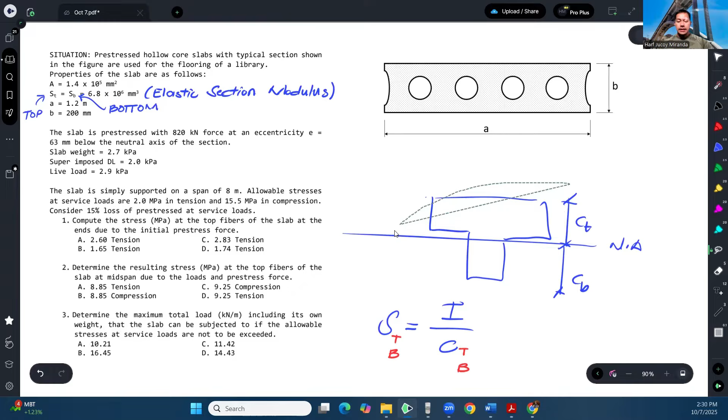Now, we use the elastic section modulus in computing bending stress. As a substitute or alternative to the formula MC over I, we can also use M over S. That is for bending stress.

You're given A to be 1.2, so this is 1.2 meters. And then B is 200 millimeters, so I can just say that this is 0.2 meter.

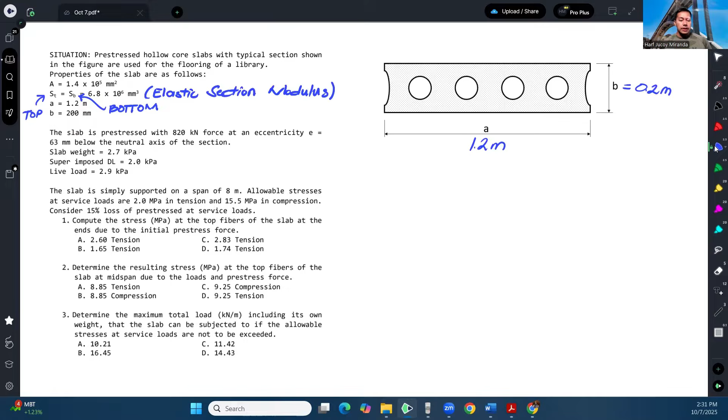So the slab is pre-stressed with 820 kilonewton force at an eccentricity of 63 millimeters below the neutral axis of the section. So the pre-stress force P is 820 kilonewton and the eccentricity is 63 millimeters.

So we are also given the following: slab weight, superimposed dead load, and live load, all in kilopascal. This means there's a superimposed dead load on top of it.

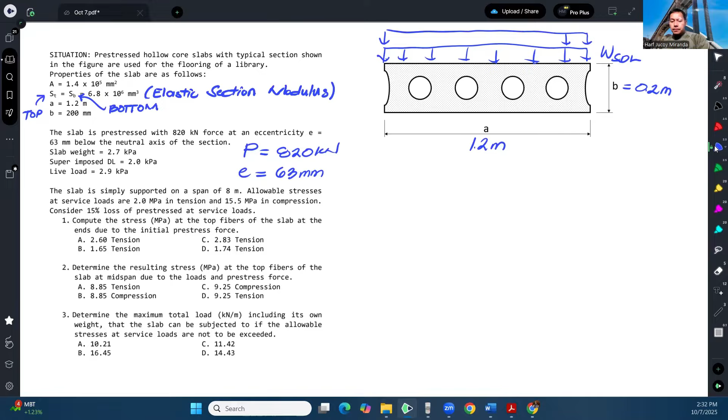So this is the cross-section, with the superimposed dead load on top, and also a live load on top. However, take note these are still in kilopascal, so to convert that into kilonewton per meter, you need to multiply by the width.

The slab is simply supported on a span of 8 meters. Allowable stresses at service load are 2 megapascal for tension and 15.5 megapascal for compression. Consider a 15% loss in pre-stress at service loads.

All right, so first question: compute the stress at the top fibers of the slab at the ends due to initial pre-stressing. So to make clear what cross-section we're discussing, let's say this is it.

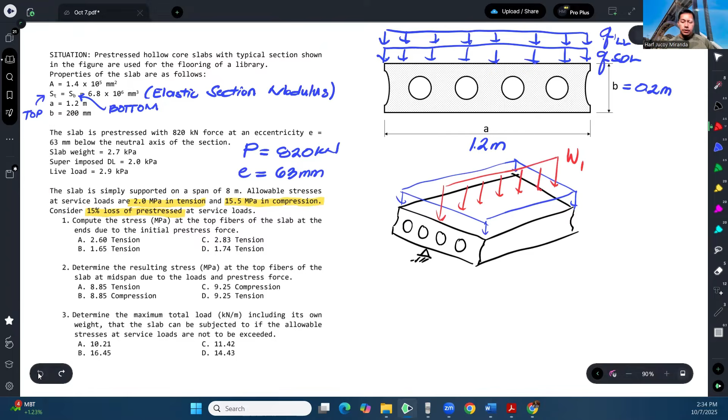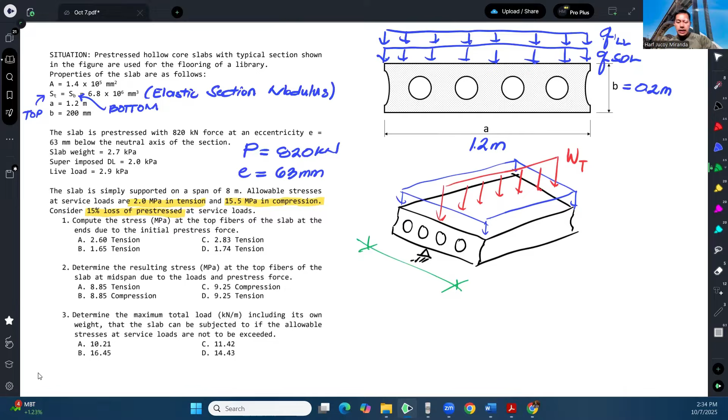Okay, W. So let's make this W total. To get W total, we need to multiply the floor load by the tributary width, which in this case is A, 1.2 meters.

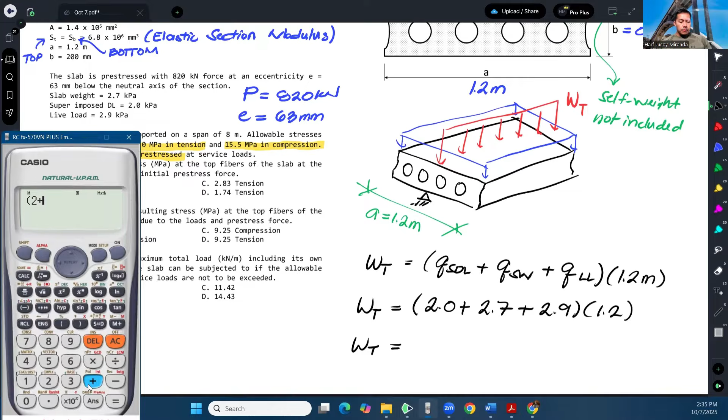Superimposed dead load is 2, self-weight is 2.7, and live load is 2.9, times 1.2. So that's going to give us a total uniform load acting on the beam equal to 2 plus 2.7 plus 2.9, times 1.2, which gives us 9.12 kilonewton per meter. That's the one acting.

By the way, this is the span referred to in the problem. So our span is 8 meters, simply supported.

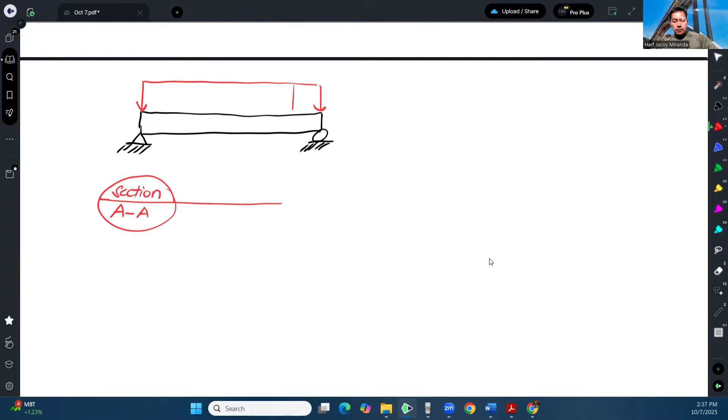Alright, so pag dyan tayo nakatingin sa direction na, ito yung itsura ng section AA. So, makikita natin, it's just a simply supported beam. Ganyan lang siya, okay, tapos ito yung uniform load. And then this is 8 meters. Alright, so ganyan lang siya.

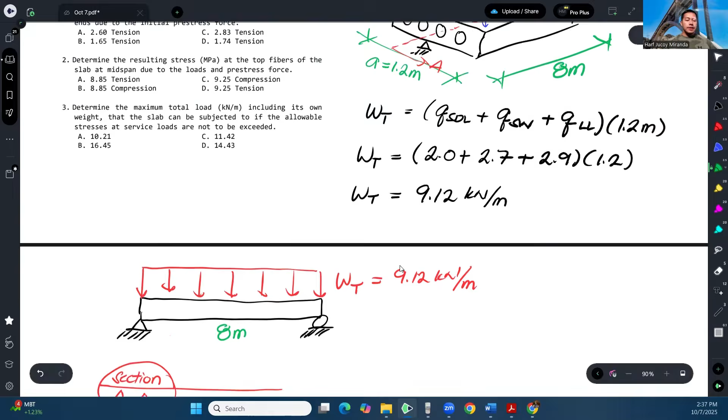So anyway, doon sa unang tanong kasi, and then bago pa dyan, ilagay ko na rin dito. Dahil meron daw pre-stress ito, merong tendons. So kunwari, ito yung tendons, no?

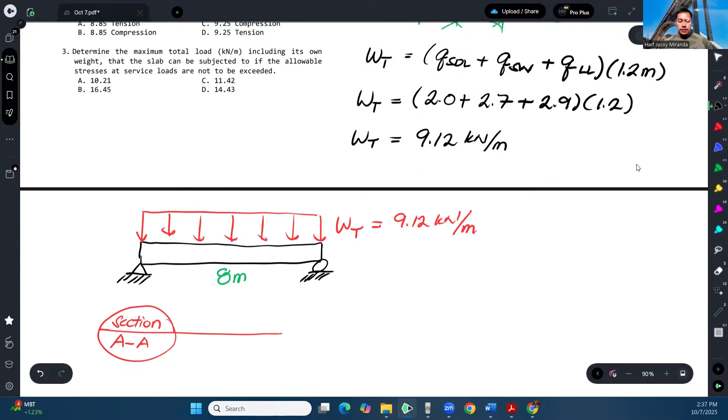Ang sabi niya naman kasi, merong eccentricity na 63 mm. So ibig sabihin, from the neutral axis, ito yung neutral axis, gitna lang kasi symmetrical naman. So, merong distance yung tendons mula doon sa neutral axis. So, kung ito yung neutral axis natin.

Okay, so yung tendon natin, potentially, nandito. Yan, kunyari nandyan. Okay? So, meron siya eccentricity na 63.

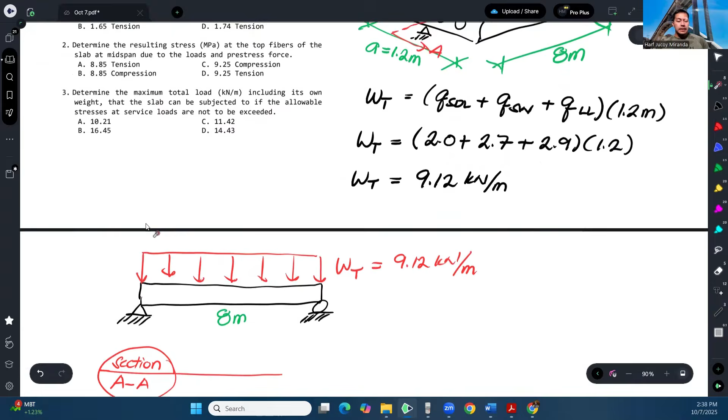Okay? So ngayon, dito walang ini-specify kung saan ba yung tendon, nasa ibabaw ba or nasa ilalim. So by default, kapag simply supported beam, ang simply supported beam kasi masasubject siya sa positive bending eh. So possible kasi na ang bending ng simply supported beam pag ganito eh, di ba?

So the purpose of pre-stress is so that it will create a negative bending, no, that will counteract yung positive bending. And di ba ang negative bending ganito ang itsura?

Alright, so that's why ang kailangan kapag simply supported beam, maglalagay ka ng force sa bandang ilalim nung neutral axis, sa bandang ilalim para ma-produce niya to. Okay, kaya by default dito, ang tinutukoy niya dito na eccentricity sa below nung neutral axis. Okay, kaya nasa ilalim siya.

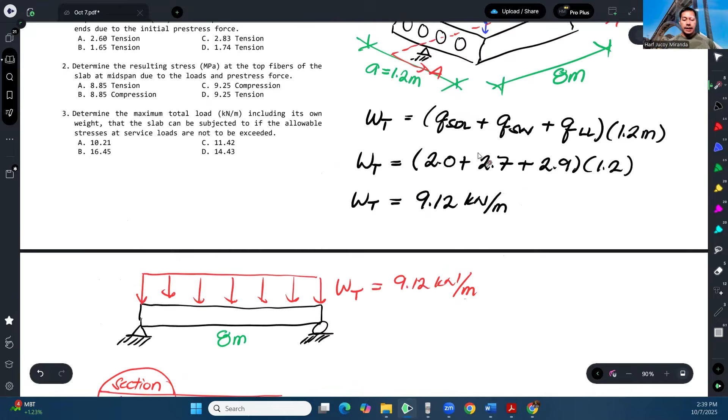Kasi kung sa ibabaw mo ilalagay yan, ang mangyayari guys, magpo-produce yan ng positive bending. So, kapag nasa ibabaw, imagine nyo, meron dito, tapos meron dito. So, syempre, ang gagawin niya dito, pag ganito. So, parang tinulungan niya pa yung load, no, na i-bend yung beam natin. Which is counterproductive dun sa gusto nating maging purpose nung pre-stress tendons.

Alright? Kaya dito, by default, sa ilalim, no? So, anyway, ito yung tendons natin.

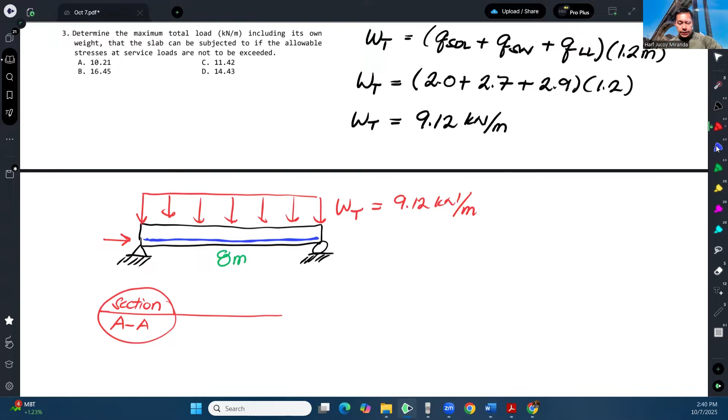Okay? Tapos yung tendon na mag-produce ng axial compressive force. Okay? And according to the problem, it is 820 kilonewtons without losses. No? So, initial yan. Okay, initial.

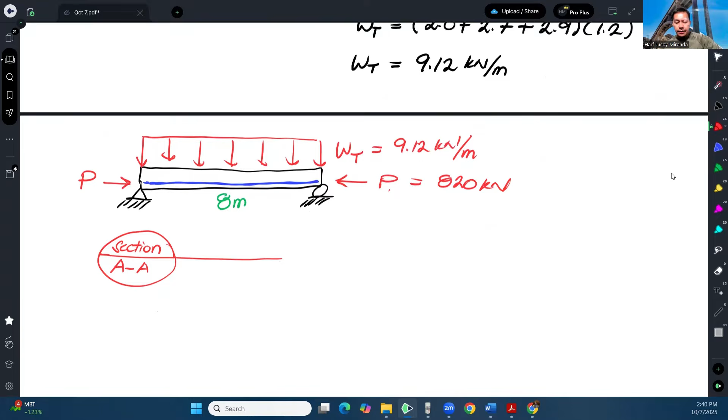No? So, kasi merong sinabi dito na loss. So, ibig sabihin, mamaya, pag nasa service loads na tayo, we need to subtract 15% of this, no? Sa analysis natin. Anyway, sa unang tanong naman, ang tinatanong lang, what is the initial pre-stress force?

Tapos, in-specify na nasa top fiber, no? Sa number 1, top fiber, so sa ibabaw, ano daw yung stress sa top fiber at the ends? So, yung nasa dulo. Okay, due to initial pre-stress force. So, dito sa end, sa dulo, no, bali ito.

Okay, so kunwari yun, pamili na lang tayo ng side. Kasi ito na lang. Kaya yung side na yan, near the end. Tawagin ko section BB.

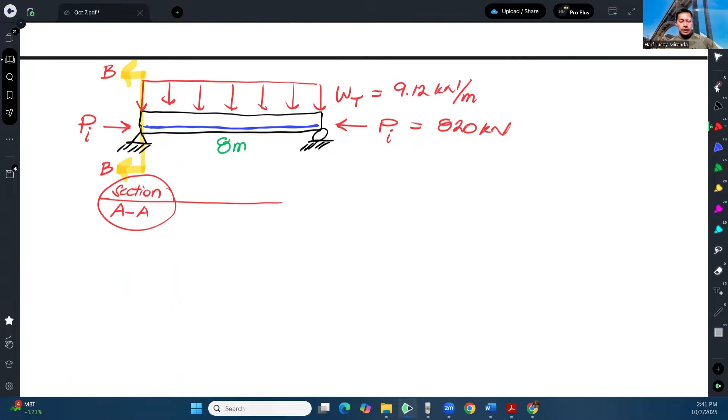So, ang itsura nun, pag pinalaki natin, ganito. Okay, tapos ito yung pre-stress tendons natin. Pinalaki lang natin yung near the end, no? Tapos ito kunwari yung neutral axis niyan. Okay, so bali ito yung cross-section niya dito, no?

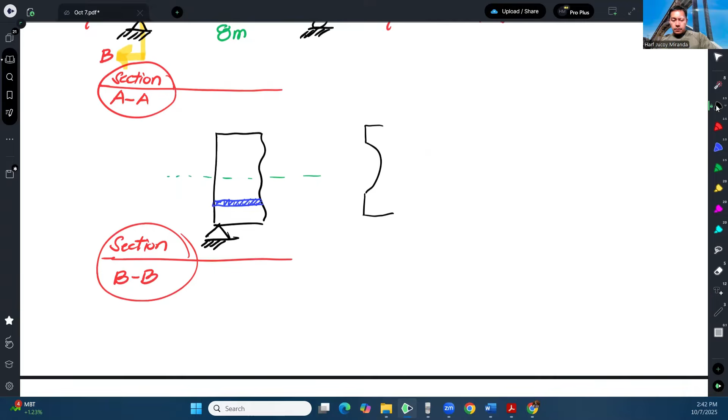Hindi ko na kukumpletuhin, ha? Pero parang ganyan yung cross-section niya. Diba? So, ito yung neutral axis. So, yung tendon na to, nandito. Yan, nandyan. Okay? So, anong gagawin ng tendon?

Mag-produce siya ng compressive force. Okay? So, mag-produce siya ng compressive force. So, yung initial compressive force na yon, dahil merong eccentricity, ito, from the neutral axis, that will also produce a bending moment.

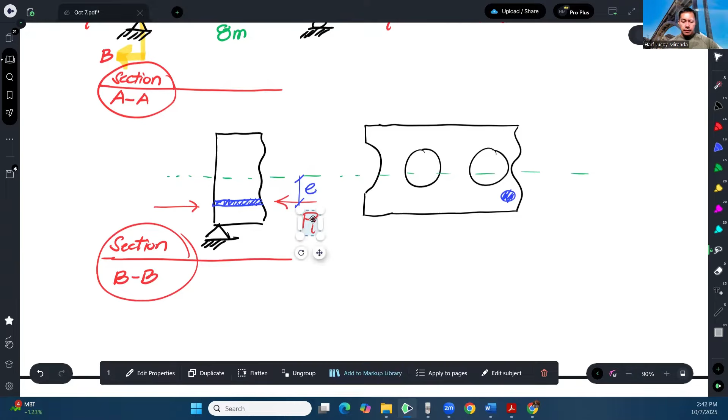Kaya mangyayari, pag nilipat natin to dito, nilipat natin dyan, no? It will produce an equivalent bending moment M due to the pre-stressing force. At yung moment na yon, due to pre-stressing force, is just P times E. Okay? So, ganyan yung mangyayari.

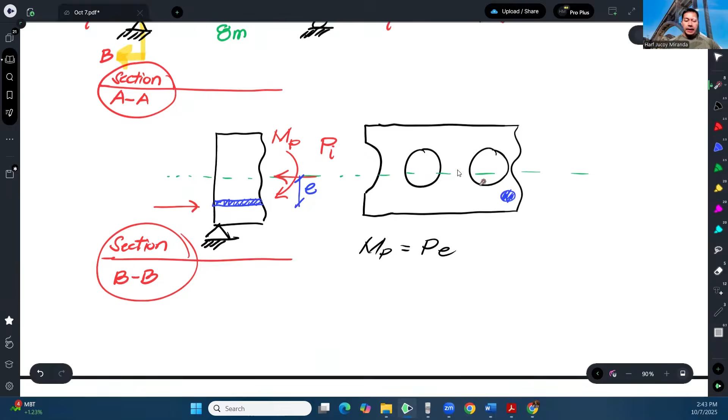So, ngayon, ang pinapa-analyze ay sa top fiber. No? So, yun nandito. Ito yung top fiber natin. Yan, yung top fiber na. So, bali, ito, pinapa-analyze. Ano daw yung magiging stress dyan?

Okay, so dahil nasa dulo tayo, nandito tayo sa dulo, walang effect itong load na to. Kasi kung babalikan natin yung magiging itsura ng moment diagram niyan, di ba? Ang itsura ng moment diagram niyan, ganito lang, zero sa dulo, tapos pa ganyan, di ba? So zero yung moment niya dito.

Kaya ang meron lang moment, no, dito sa particular section na to, sa near the end, would be the one that is produced by the eccentric na compressive force galing sa pre-stress or sa tendons. Okay, kaya bali ganito lang yan.

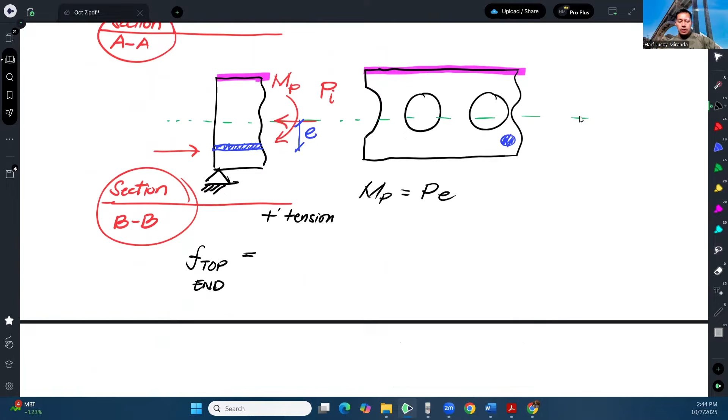So, in number 1, we will need to calculate the stress at the top, no? Sa near the end. Okay, and then lagay lang ako ng sign convention. Di ba normally ginagawa natin positive yung tension, tapos negative yung compression.

Okay, so the PI in this section will produce a compressive force. Because it's compressive, PI over area is negative. And then the MP, the moment due to the pre-stressing force, its effect at the top will be tension, so we make it plus. Moment MP, then we have C, which is supposedly MC over I, right?

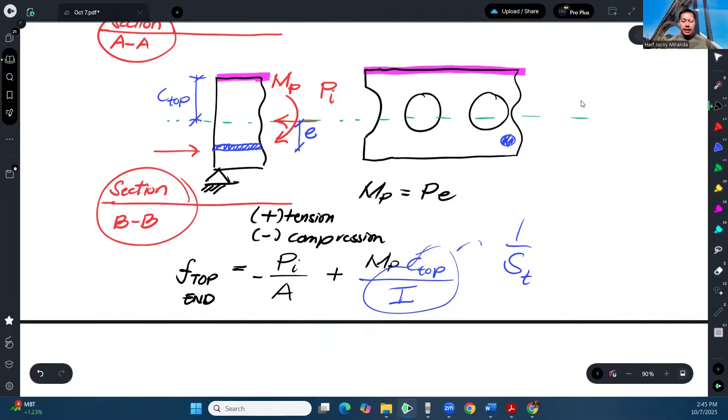That's the C at the top. That should be it, but let me just highlight it. Over I, right? That should be the formula, but take note that this is equal to 1 over S at the top. So we can rewrite the formula for the stress at the top at the end to be equal to negative PI initial over area plus MP over S top. This is because this is also the given value. So instead of using MC over I, we use M over S. And all we have to do here is substitute everything for number 1.

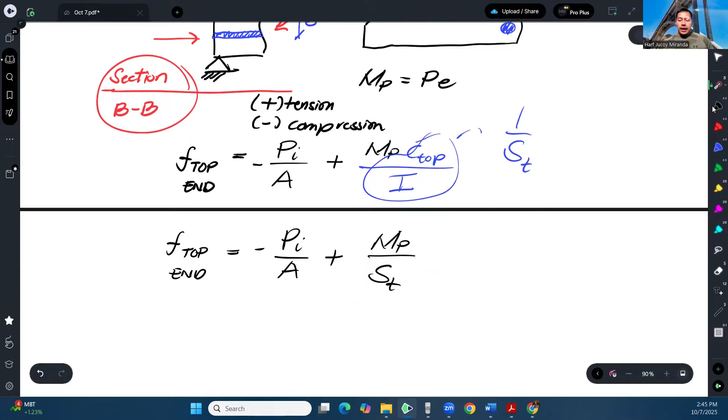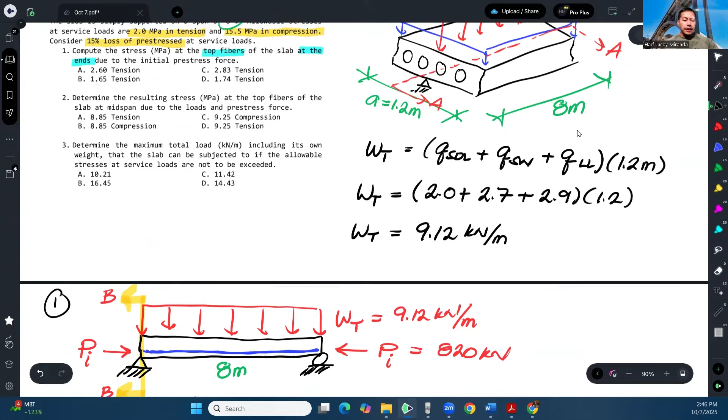So we have negative, the initial pre-stressing force is 820. We want this in megapascals, so let's convert to Newtons and millimeters. As for the area, it's already in millimeters, 1.4 times 10 to the 5. Plus, the MP is PE, so 820, in Newtons. The E is 63, over S, and S is 6.8 times 10 to the 6.

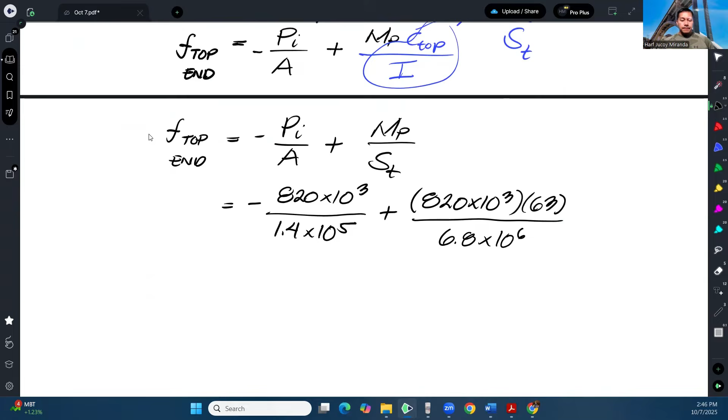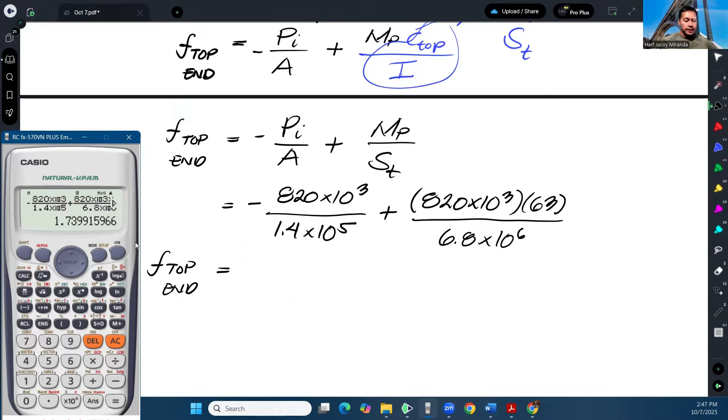From here, we can calculate the stress at the top of the end section. That is negative 820,000 over 1.4 times 10 to the 5, plus 820,000 times 63, which is the M over S, over 6.8 times 10 to the 6. So that gives us positive 1.74 megapascal. The positive sign here means tension.

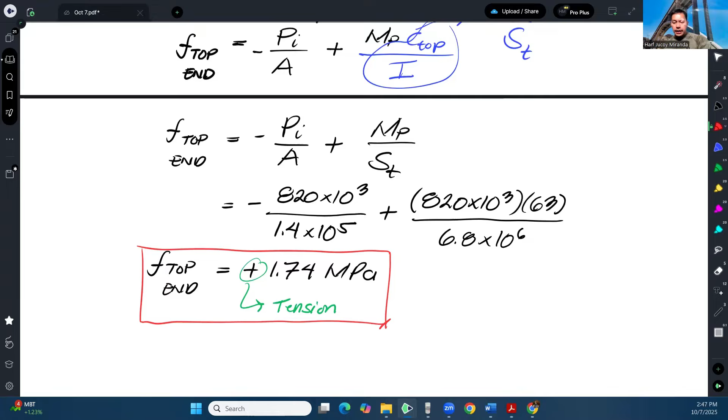Based on our assigned sign convention. So therefore, for number 1, our answer would be 1.74 under tension.

Next, determine the resulting stress at the top fibers of the slab at midspan due to the loads and the pre-stress force. So it's asking what the stress will be. You need to specify the section being analyzed when finding stress in prestressed concrete. Like in the first problem, it said the section was at the ends, so we analyzed the section at the end.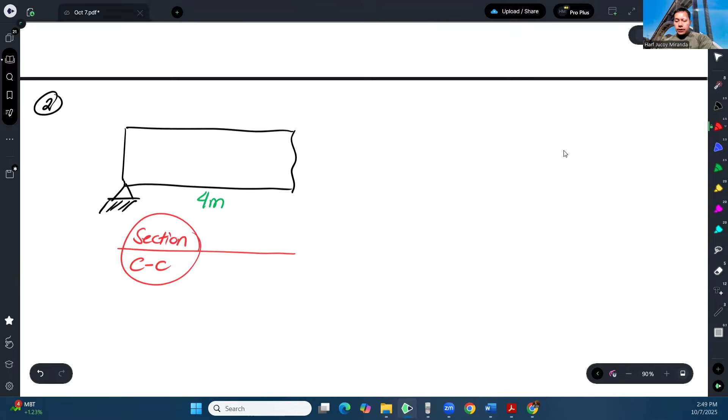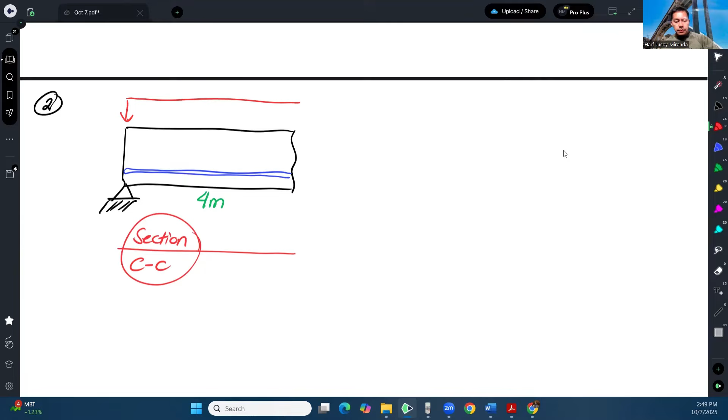So what we need to analyze is this. This time, this is 4 meters because it's midspan. Then these are our tendons. There was no mention of tapering in the tendon, so that means the eccentricity is constant throughout the span. So it remains at 63 at the bottom. And then we have a uniform load here.

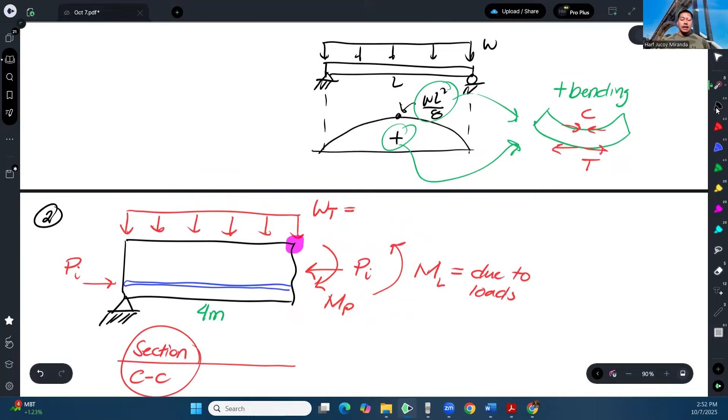So ibig sabihin, yung magiging effect na moment nung dahil sa loads, ML na lang, moment due to loads. So ganyan ang magiging direction pag ganyan. So ibig sabihin, this will be compression, dahil dun sa mga loads. Alright? So yan lahat ng forces acting on that section.

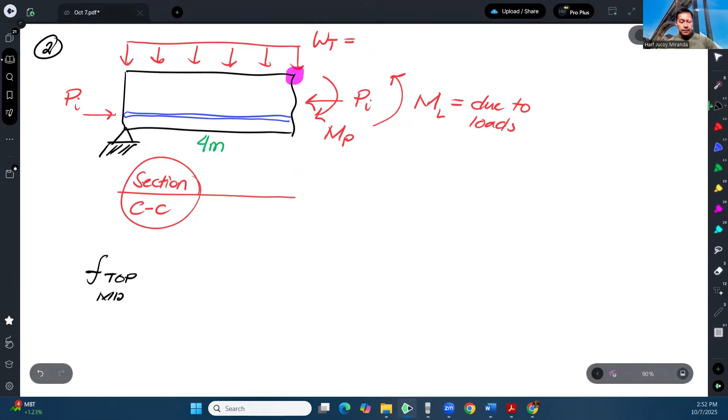So we can now compute the stress at the top sa midspan. Okay? So ano yung stress at the top at the midspan?

So ganun pa rin, I will assume positive yung tension and negative yung compression. Okay? So of course, yung PI, ano siya, compression siya.

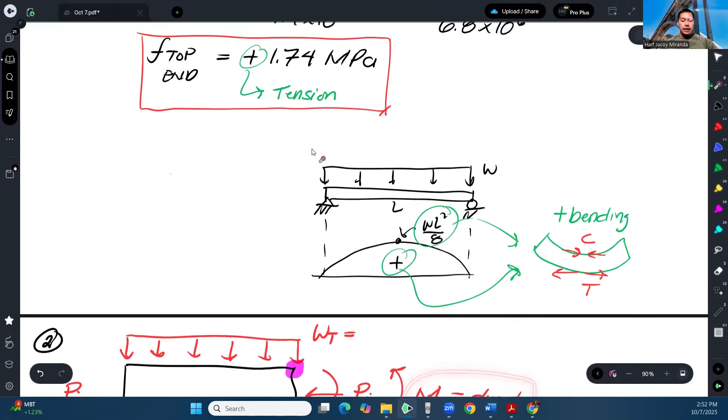So negative, no, PI. Kaya lang dahil meron ng presence ng service load, meron ng presence ng load. Sabi kasi dito sa problem, consider 15% loss at service load. So ito kasi meron na tayong loads and the pre-stress force. So kumbaga, i-consider natin ngayon yung 15% na yun. Kaya mangyari, itong PI na to will now become, mababawasan lang ng 15%.

So magiging 1 minus 0.15 PI over A. Okay, and then, yung MP na ibibigay, yung moment na ibibigay ni MP, lagay ko nandito. This is PI times E. Ito naman, this is WTL squared over 8.

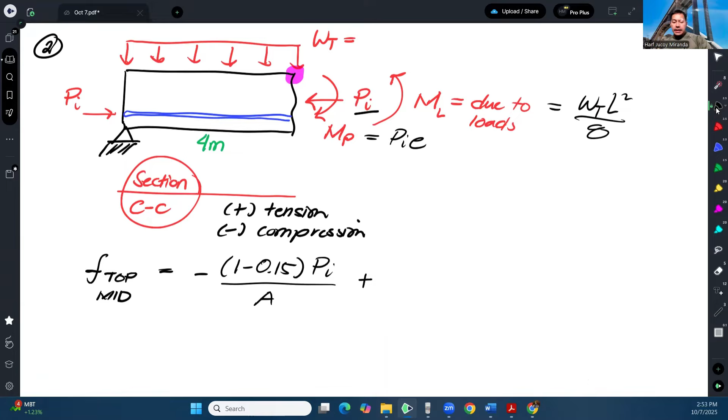So, yung moment na ipoproduce ni MP ay, I mean rather, tension, dun sa top. So, dahil tension, plus. Tapos yung MP natin ay PIE. Pero again, dahil meron ng loss, maglalagay ako ng 1 minus 0.15, PIE over S top. Okay? Sa top. Because we are analyzing the top.

And then, lastly, yung moment due to the loads ay magiging compression, papunta dun. So, dahil compression yan, therefore negative siya. At ano yung moment? So, ito yung moment. Lagay ko na lang siguro WT L squared over 8 tapos over S sa top. So, yan ngayon yung computation natin dun sa stress at the midspan na nasa top ng midspan.

Alright? So, substitute natin yung values. We have negative. Ito magiging 0.85 na lang. PI is 820. Gawin ulit nating Newton para maging megapascal yung sagot. Over area, so 1.4 times 10 to the 5 plus 0.85, 820, gawin nating Newton.

Okay, tapos yung E ay 63 over S. Yung S natin ay 6.8 times 10 to the 6. And then lastly, yung due to load.

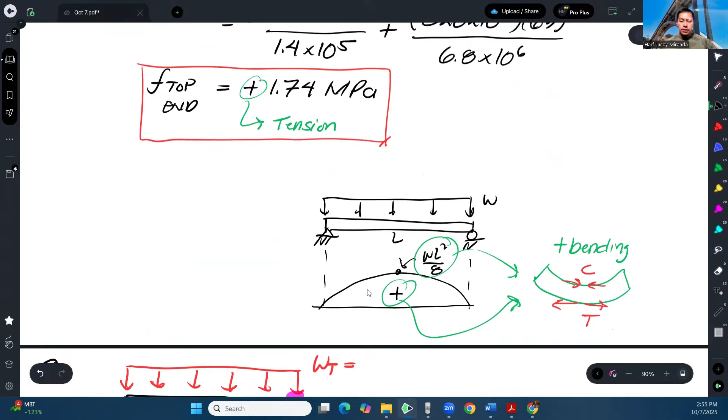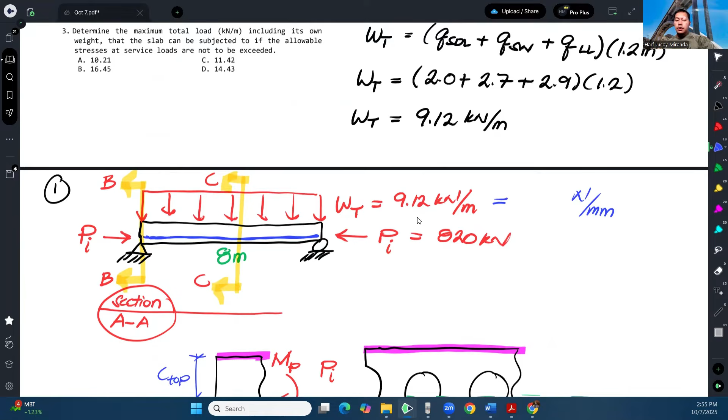So take note, yung WT natin kanina ay 9.12 kilonewton per meter. Gusto ko lang i-highlight na dahil ang goal nga natin maging megapascal yung sagot, di ba gusto natin ito ay maging Newton per mm instead of kilonewton per meter. But I believe I already explained before na yung kilonewton per meter saka Newton per mm parehas lang. Kaya 9.12 pa rin yan.

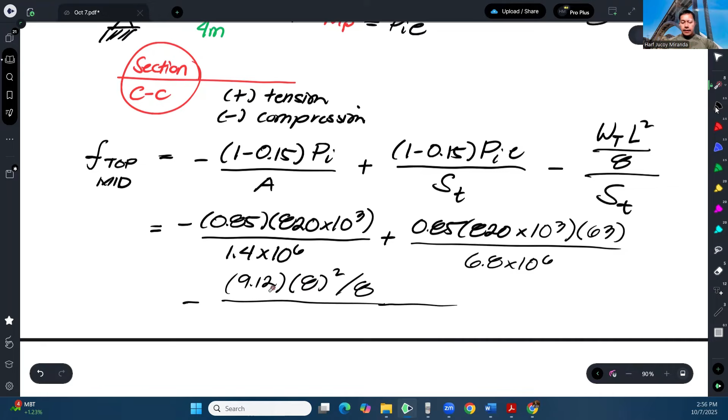So we have 9.12 L, so that's 8, squared over 8 over S. Oo nga pala, meron lang akong konting adjustment dito kasi magiging units nito guys. Actually, wag mo na lang muna pala i-convert ng Newton per mm.

Okay? Hindi, pwede naman. Pwede namang i-convert to ng Newton per mm. Tapos kaya lang, ito dapat ay naka-mm. So, dapat 8,000, no? Pwede naman, naka-Newton per mm, tapos 8,000 ito. Or, pwede rin na naka-kilonewton per meter muna to, tapos naka-meter to. So, ang magiging sagot mo ngayon dito, kilonewton meter.

So, para maging Newton mm, mag-multiply ka ng 1 million. Okay? Para maging Newton mm. Kasi di ba gusto natin megapascal yung sagot. So be careful sa part na to, medyo ako as a student before, gets ko naman to, pero minsan nagkakamali akong mag-compute kasi dahil dun sa conversion ng units.

Minsan nakakalimutan na i-convert yung units ng isang term into megapascal, kaya you have to be careful. Itong part na to, inassume ko na lang na ito ay kilonewton per meter kasi parehas lang din naman yung Newton, yung kilonewton per meter at saka Newton per mm. Kaya ako nag-decide na ganun, para itong length na to gagawin ko na lang munang meter, para yung magiging value ng moment na to ay kilonewton meter muna. Alam naman natin na para ma-convert ang kilonewton meter sa Newton mm, mag-multiply tayo ng 1 million. Pwede rin na isipin mo Newton per mm to, at kapag ginawa mo yon, you have to make this millimeters, so gagawin mo itong 8,000. Same lang yon, ipapakita ko na lang mamaya.

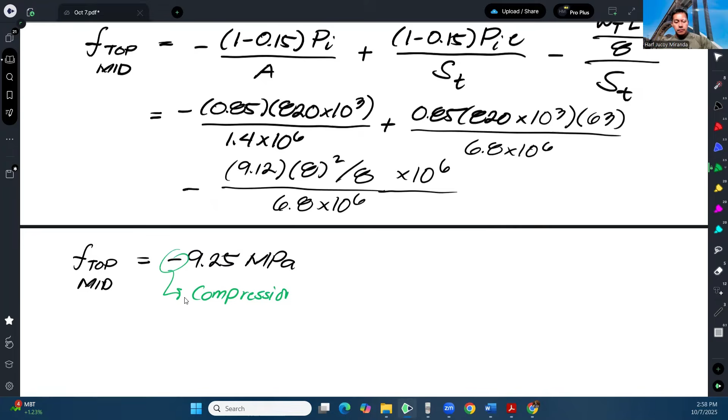So the negative sign here indicates that this is under compression. Okay, so ito yung sinasabi ko kanina.

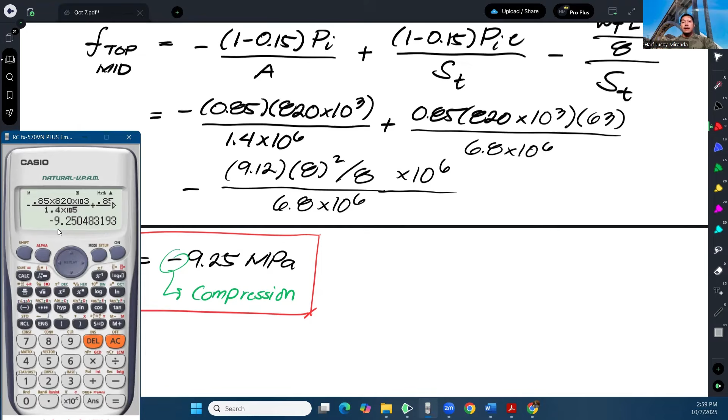Pwede rin guys na ang isip ko ditong sa 9.12 ay naka-Newton per mm, so gagawin ko tong mm. Pero dahil ginawa ko ng mm yan, so Newton mm na yan, so hindi na ako mag-multiply ng 1 million. Same lang din yung lalabas na sagot. Okay, so yun yung ibig ko sabihin. So that's our answer for number 2.

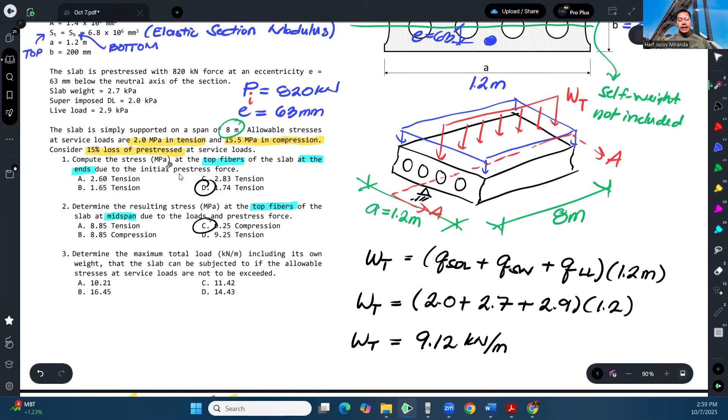So of course, ang nangyayari kasi dahil sa yung normally kung wala naman yang tendon, normally ang mangyayari talaga sa ilalim yung tension, sa ibabaw yung compression. So sa tulong ng tendons, minsan nalilessen lang itong tension na to. Okay, so sa tulong ng pre-stress, nalilessen ito. Kaya we have to check both, no, yung top and bottom sa midspan.

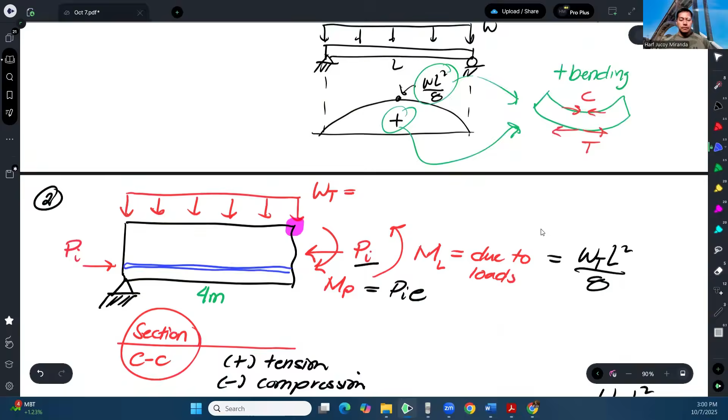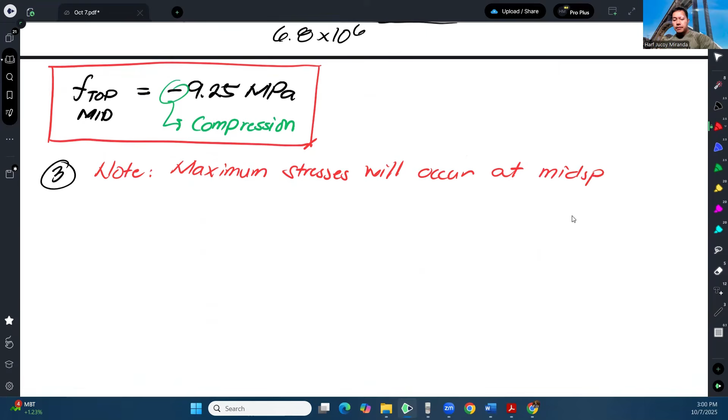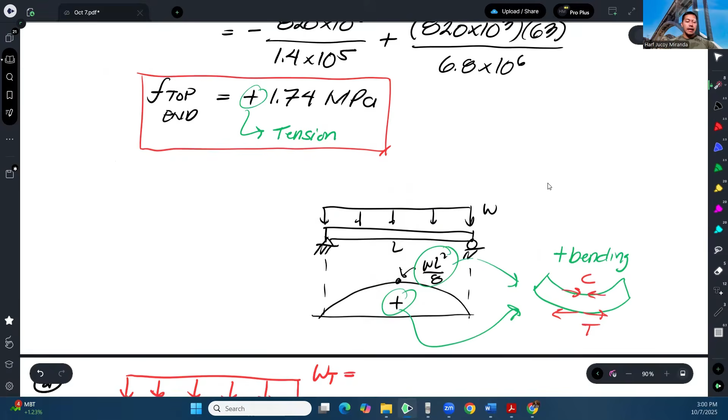So for number 3, note that maximum stresses will occur at the midspan. Bakit, you might ask? Kita naman sa moment diagram, doon mangyayari kasi maximum eh. Kaya doon tayo mag-analyze. Kumbaga, walang sinabi dito sa item sa number 3 na doon ka sa midspan mag-analyze. Walang sinabing ganun. Kailangan lang naintindihan natin na dahil nandun yung maximum bending moment kapag dinrawing mo yung moment diagram niya, eh di common sense dictates that doon ka mag-analyze, di ba? So doon tayo sa midspan.

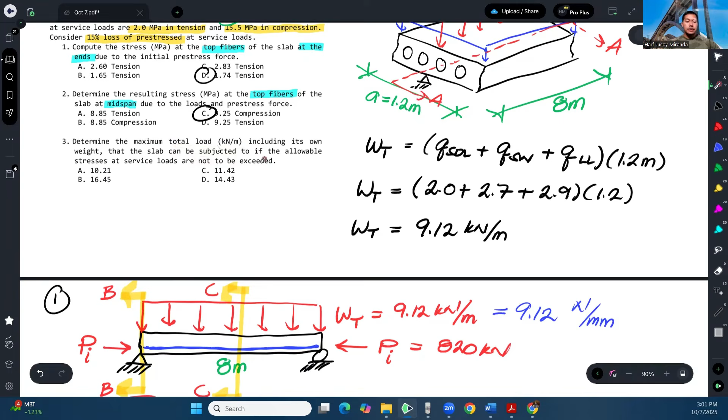Okay, so bali parang magiging ganito guys, para lang siyang number 2. Dito, ito yung analysis natin, i-adapt ko lang to. Yun nga lang, ang magiging unknown natin ngayon, itong WT na to, magiging unknown natin yan. So gusto nating malaman ngayon, ano yung maximum na kaya nitong dalhin na ipapatong mo dito para yung allowable stress sa compression tsaka sa tension hindi malalagpasan.

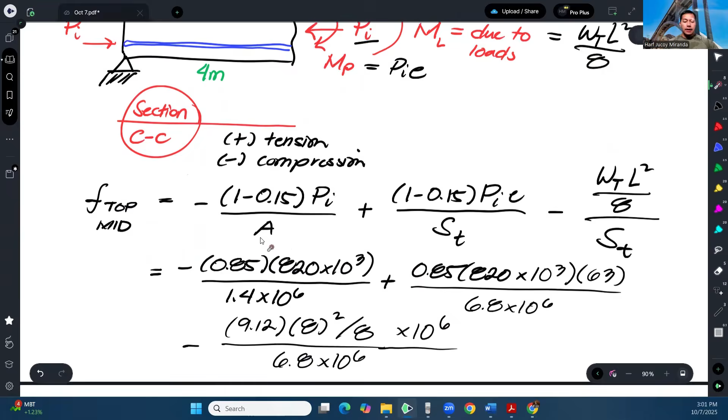Okay, now another note before I proceed, before I do the computation. So another note that without the presence of the pre-stressing tendons, yung top, kapag simply supported beam, yung top is under compression, while the bottom will be under tension. And like I said nga, sa paglalagay natin ng pre-stressing tendons, ang nangyayari lang ay natutulungan natin yung concrete na hindi masyadong ma-stress sa tension side.

Kasi bakit sa tension side yung lagi nating pinag-uusapan? Dahil kung babalikan natin or kung maalala natin from our discussion sa RCD, sa concrete design, ang concrete kasi is very weak in tension. So that's why pine-prevent natin siya na masyadong or ma-overstress sa tension. Kaya naglalagay tayo ng

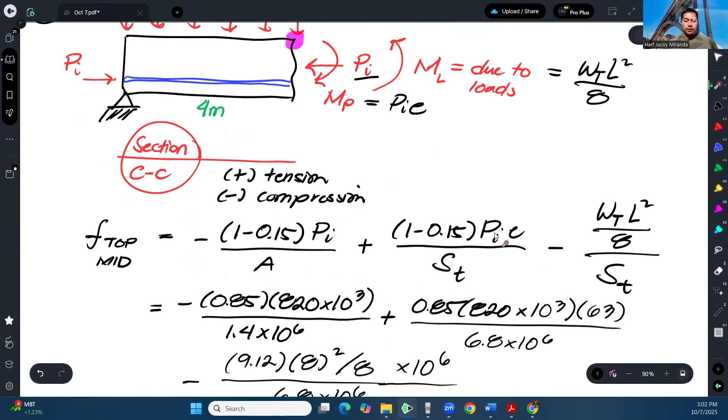pre-stressing forces. Okay, so kasi imagine nyo, tingnan nyo to. Imagine nyo na wala to, wala ito, so wala rin itong moment. So kapag naghanap ka ngayon ng stress, let's say dito sa bottom, bali as you can see, sa moment na ipoproduce ng load, tension siya, di ba? So bali, wala ito, meron ka lang positive, tapos ito yung magiging stress mo, so magiging tension yung stress mo doon sa bottom.

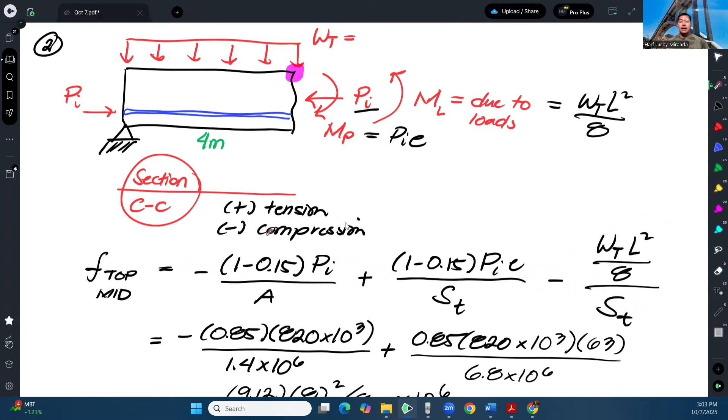Okay, once we apply this load, because of the bottom, this becomes plus, tension, because compression produces negative due to this moment, and this force will also be negative because it's compression. So it's negative, negative, positive. So our positive value now, or our tension, will be reduced. That's what the pre-stressing tendons do.

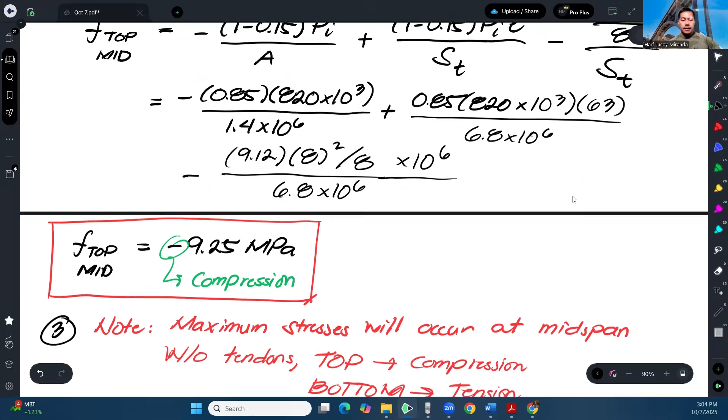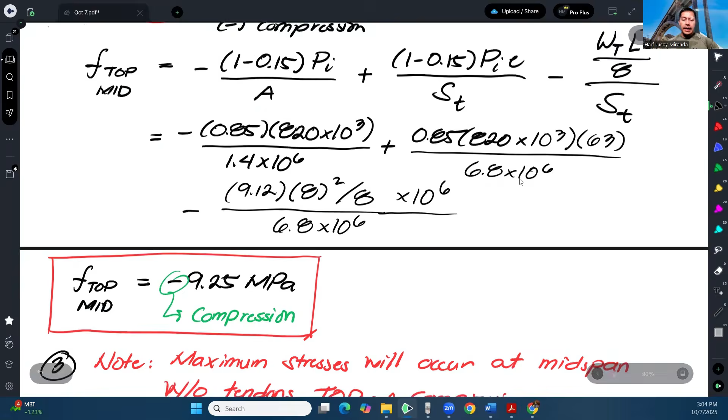So what are the stresses here at the bottom at midspan? Due to PI, what is it? Okay, so due to PI, it's compression, right? But because we have pre-stressing loss, we need to consider that. So we have 0.85 PI over A. Then, because of this moment, it will also produce compression, so negative again.

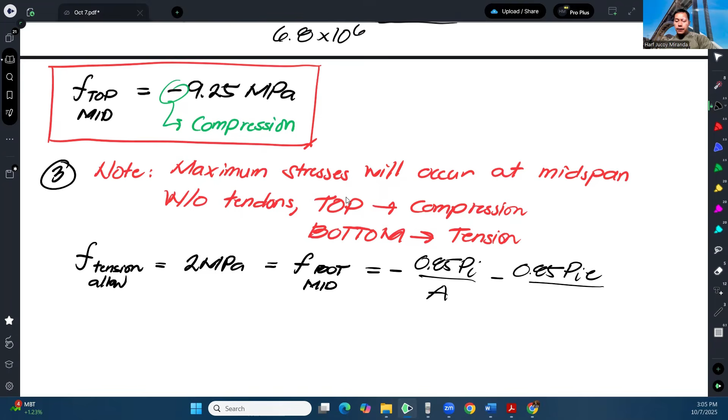PI E over ST. And because of this ML, it will produce tension, so positive. So that's how our computation will look.

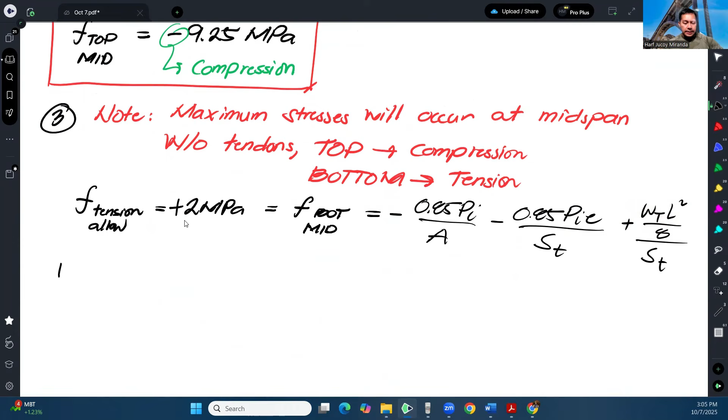And then we will solve for WT for this case. Take note, because this is tension, this is positive. So let's set it up: positive 2 is equal to negative 0.85 times 820 kilonewton over area, and the area is 1.4 times 10 to the 5, minus 0.85 times 820 kilonewtons times E over S, the section modulus, which is 6.8 times 10 to the 6.

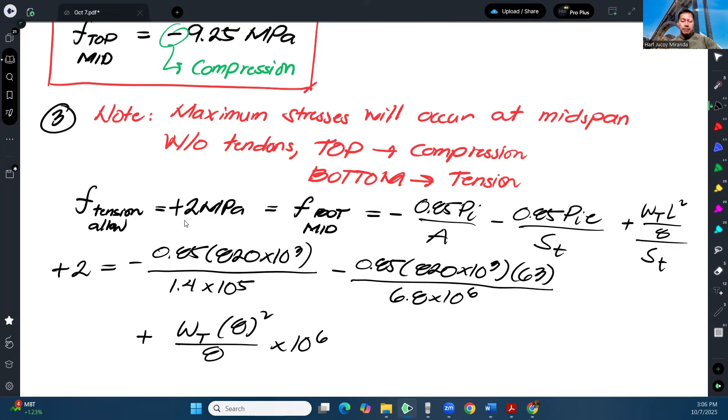And then W sub T. Just like the equation earlier, let's think of W sub T as kilonewton per meter. So this becomes 8 squared over 8. I'll multiply by 1 million to convert to Newton millimeter over ST.

So what we'll do is solve for WT. This is still the same, negative, but this should also be negative, and this should be positive, and this should be unknown. Let me revert this to the original setup. That could also work, but I'll base it on the equation I already set. So, all equal to positive 2, and we solve for W sub T, and the answer is 11.42 kilonewton per meter.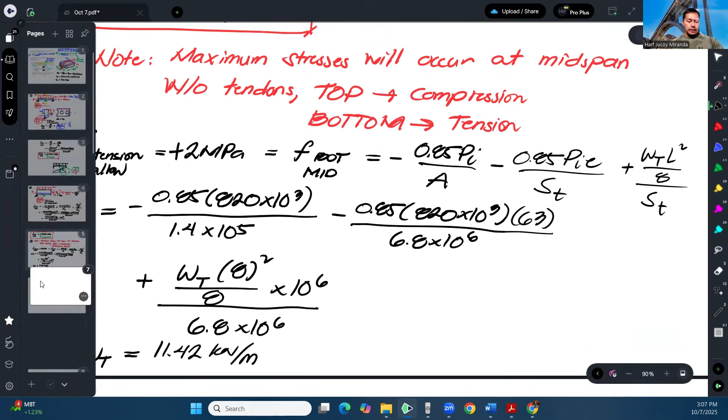But that's not yet our final answer. We also have to check the other allowable stress, the one for compression. So to prevent the allowable tensile stress from being exceeded, the total load applied on the prestressed beam should only be 11.42 kilonewton per meter.

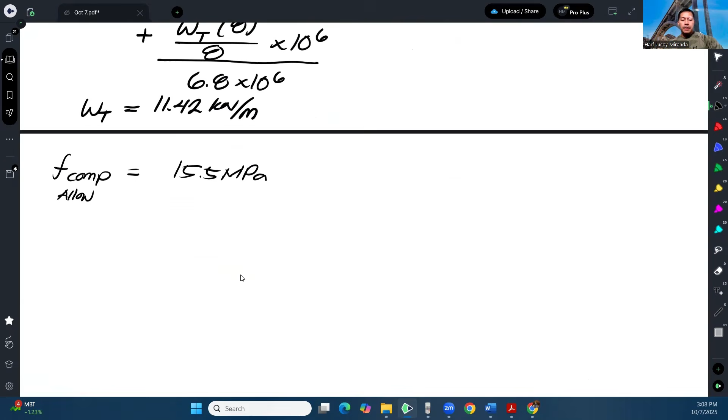But now we also need to check the compression side, the allowable stress, which is equal to 15.5 megapascal. This is given in the problem. This compression will be produced at the top, at midspan, as discussed earlier. So for this equation, it's actually the same setup.

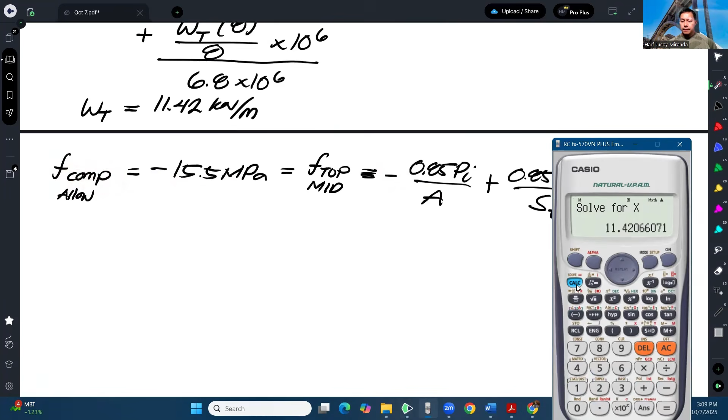So in our computation, this remains negative, this becomes positive, then this one is negative, and this should be negative 15.5. The result there is 14.43 kilonewton per meter.

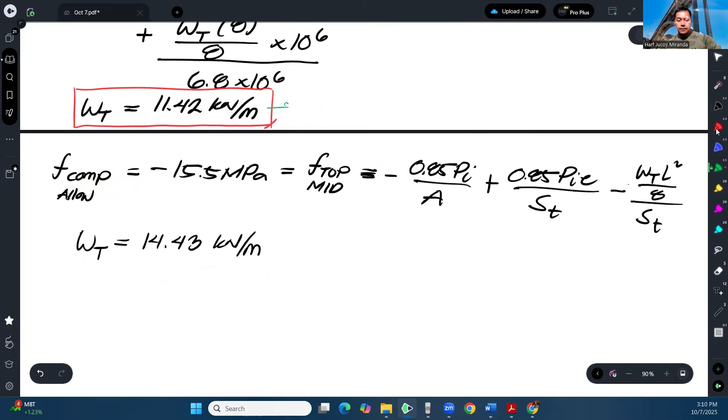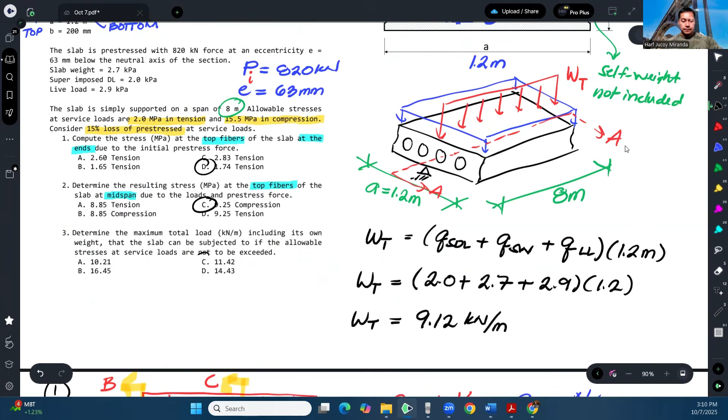So for number 3, our answer would be letter C. That's how we solve this problem.